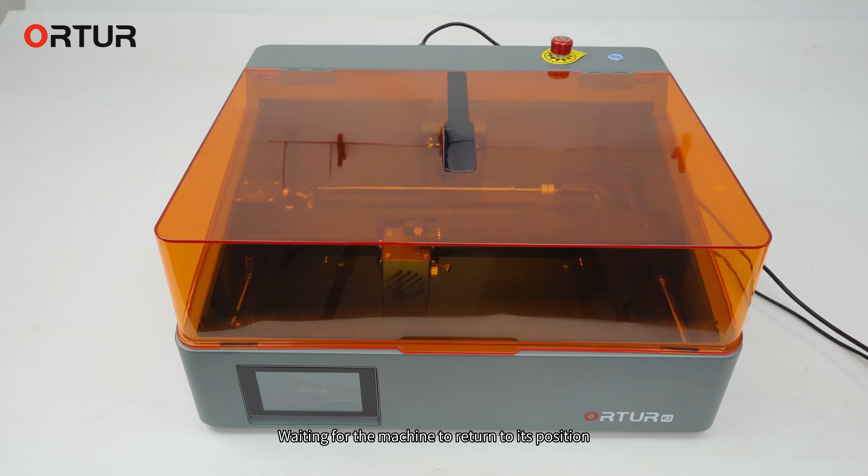Plug in the USB cable and power cord. Long press the power button to switch on. Wait for the machine to return to its position.

Open the machine cover. Place the item to be engraved. Adjust the laser module focus. Note, laser engraving is most effective when the focusing bar is just touching the engraved item.

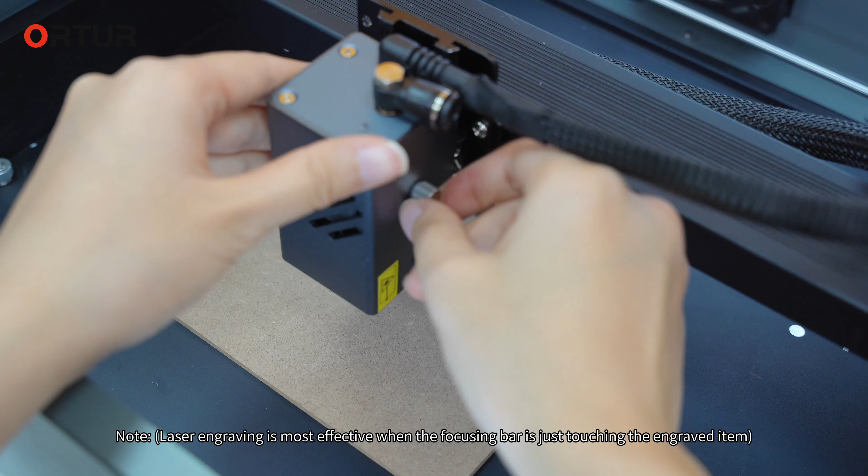When LightBurn connects to the machine for the first time, create the connection manually. Double-click to open LightBurn. Click on Create Manually. Select GRBL. Click on Next. Select Serial/USB. Click on Next.

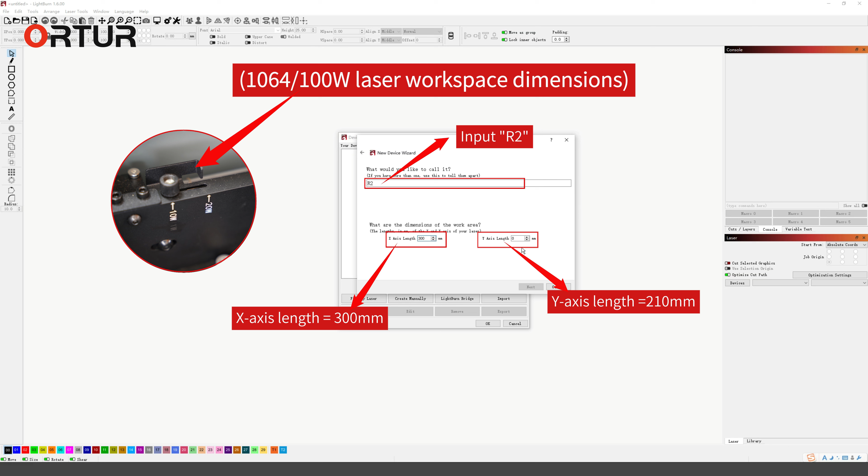1064/100W laser workspace dimensions. Input R2. X-axis length equals 300 mm. Y-axis length equals 210 mm. 20W laser working area size. Enter R2. X-axis length equals 300 mm. Y-axis length equals 190 mm.

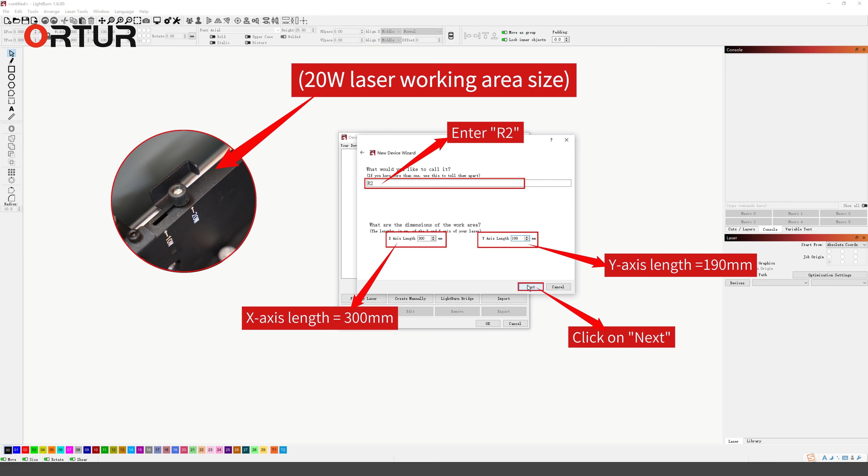Click on Next. Select front left. Click to switch off Auto Home your laser on startup. Click on Next. Click Finish. Click on R2. Click OK.

Connecting the machine, COM port numbers vary from computer to computer. Select the console layer. If OK is displayed, the connection is successful. After successfully connecting the machine, set the next adaptation parameters for the software.

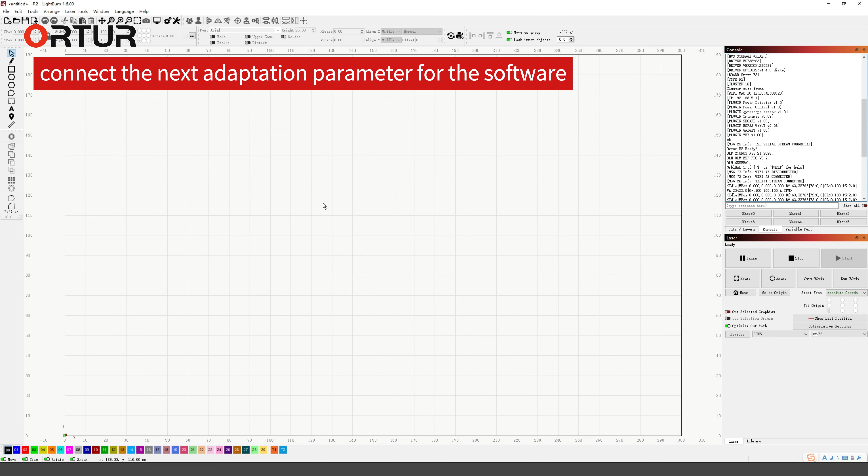Click Edit. Setup. Select Better for Diodes, mm/min. Click OK. Click Edit again. Device Settings. Select Activate Laser Ignition button. This activates the laser when scanning the border.

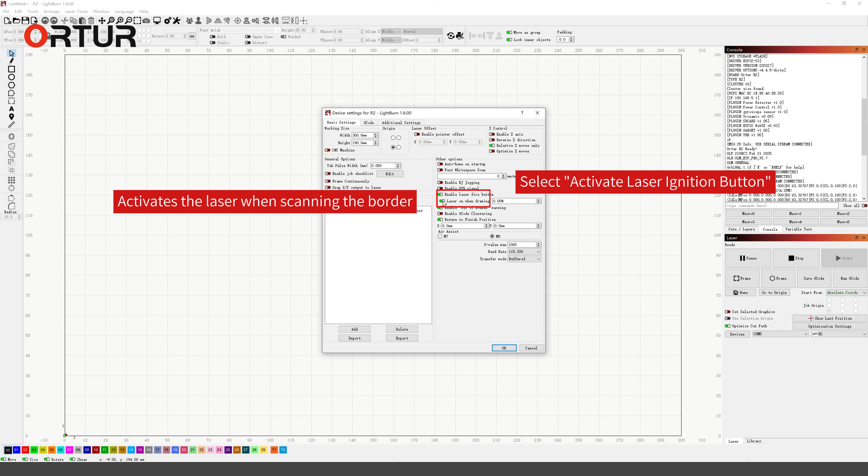Click OK. Click on the Window. Select Move. Click on the Move panel. Power equals 2%. Setting the parameters of the engraving file. Importing the image to be engraved.

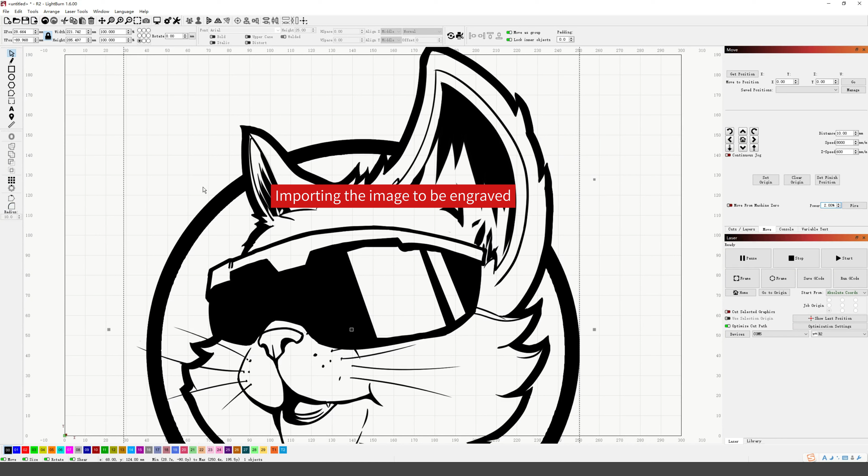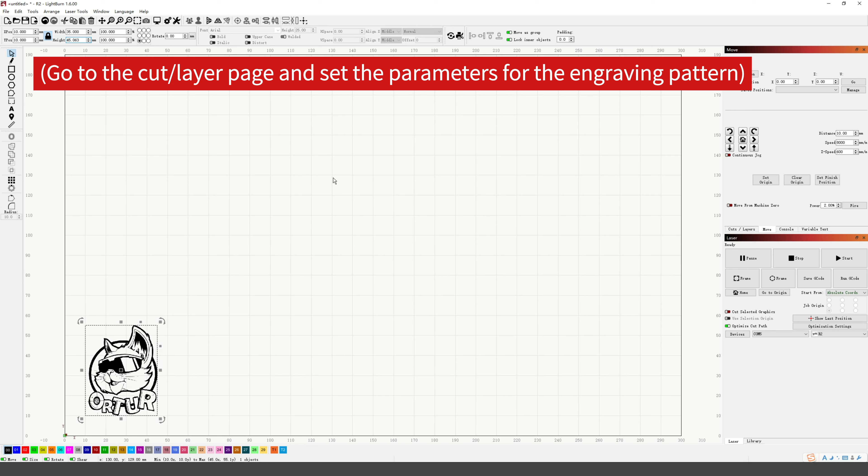X-axis position equals 10 mm. Y-axis position equals 10 mm. Set the width and height according to the size you need to carve. Select the bottom left corner. Go to the Cut/Layer page and set the parameters for the engraving pattern. Select Cut/Layer. Double-click to open the layer.

Engraving layer page parameters. Speed, mm/min, equals 20,000. Maximum power, percent, equals 100. Different engraving speed and power for different materials. Constant power mode, off. Click to close overscan.

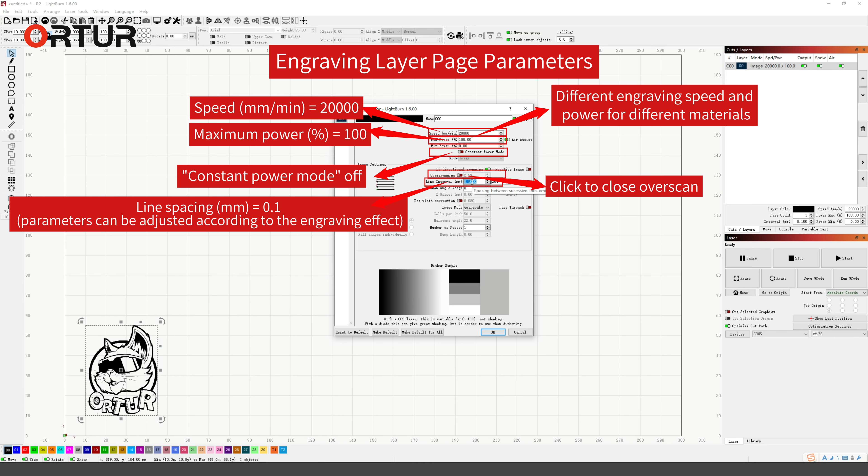Line spacing equals 0.1, parameters can be adjusted according to the engraving effect. Layer mode, grayscale. Passes, one time. Click OK. Select Start, Absolute Coordinates. Different start positions can also be selected according to individual usage habits.

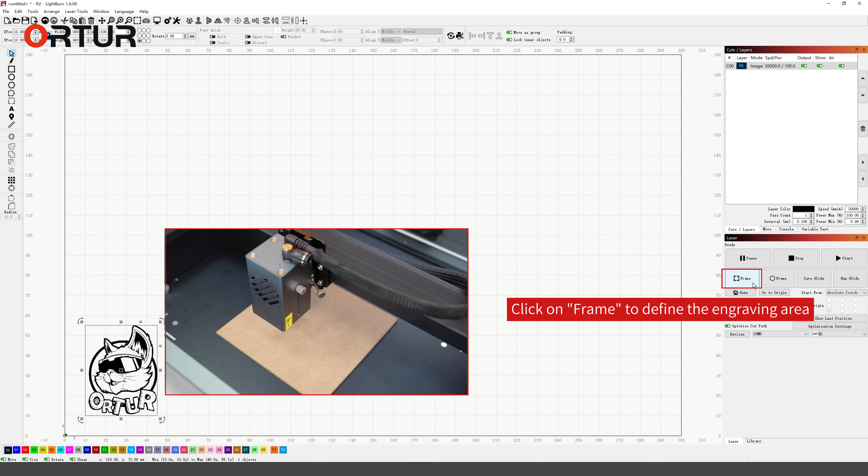Click on Frame to define the engraving area. Click the Start button to begin engraving.

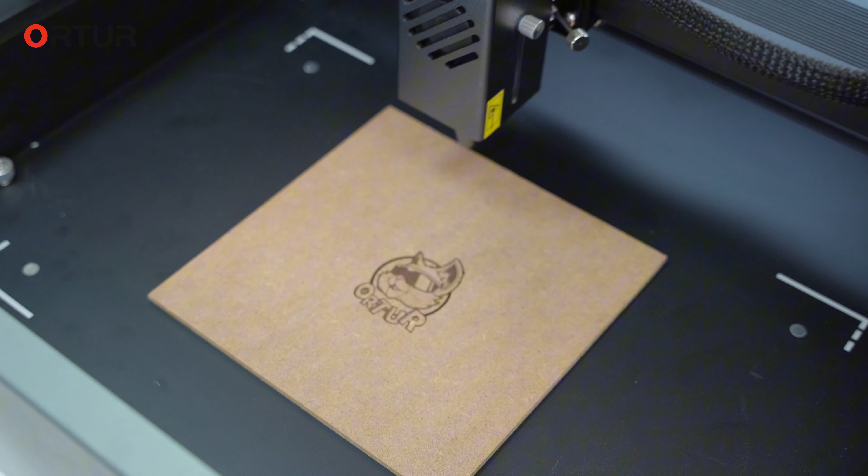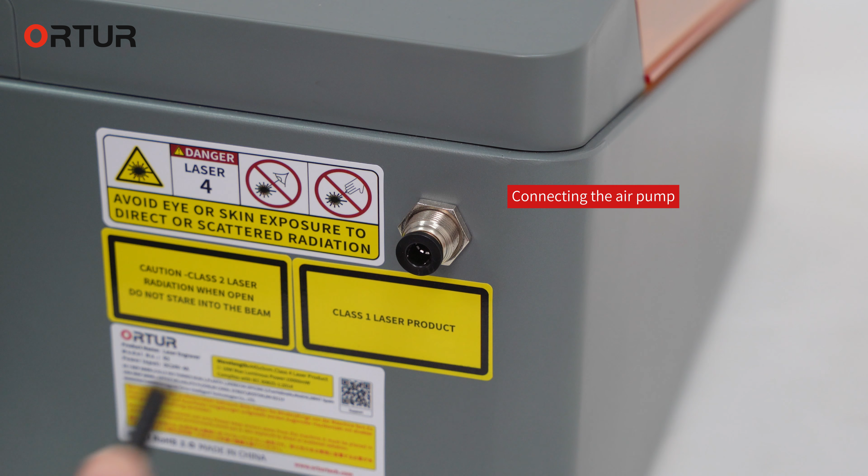Cut layer page parameter settings. Put on the air hose. Connecting the air pump. Double-click to open the layer. Speed, mm/min, equals 200. Maximum power, percent, equals 100.

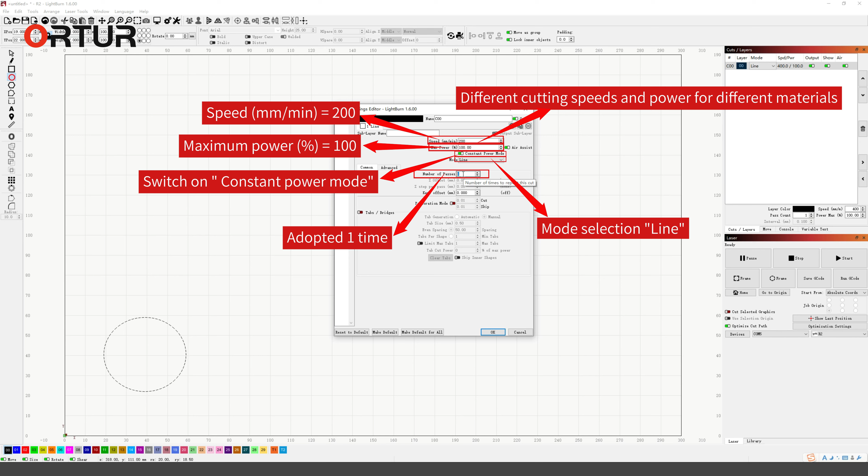Different cutting speeds and power for different materials. Switch on constant power mode. Mode selection, line. Passes, one time. Click OK. Click on Frame to define the cutting range. Click the Start button to begin cutting.